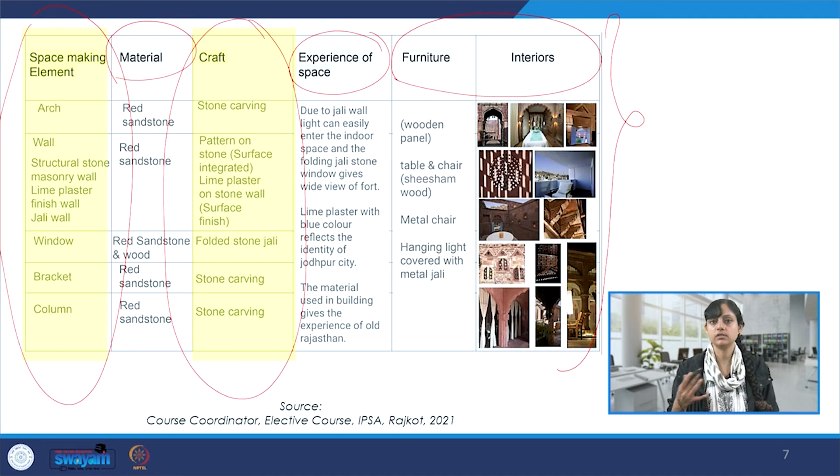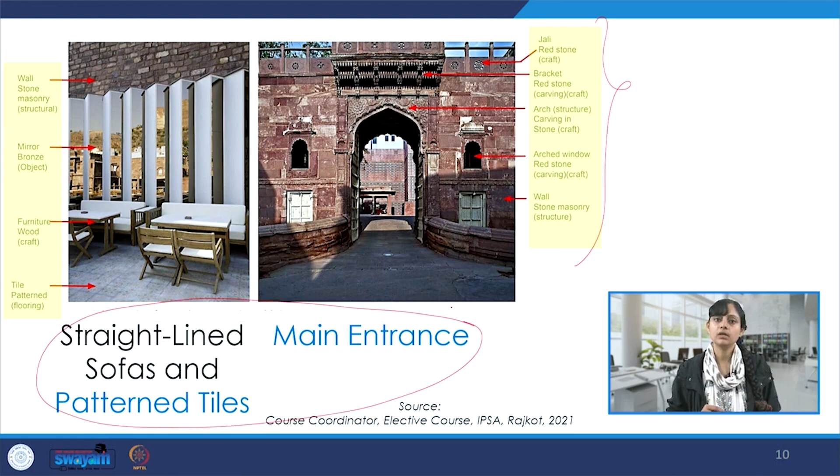So a lot of inventories like this, all focused on RAAS, and also on the communities and makers. Then these visual directories and observational analyses, where we had analytical documentation with important inferences, especially highlighting the fusion between craft and space making. More details we saw over here.

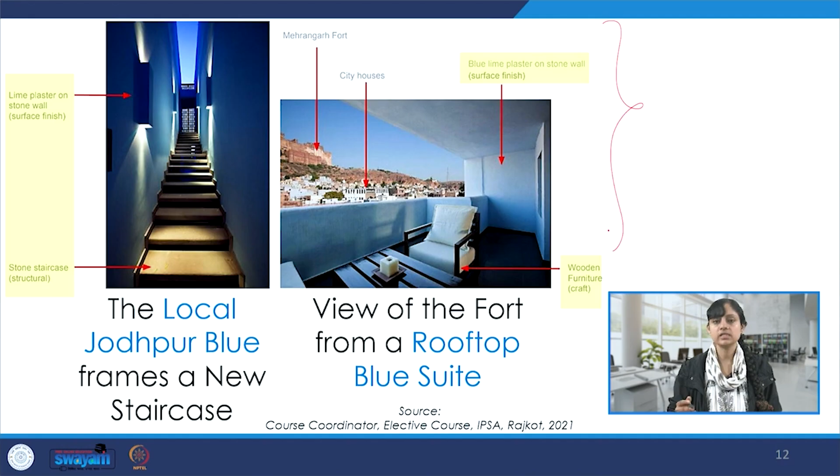So I'm browsing through these slides as a recap. It's a very awarded and celebrated project, and we could see why through all of these details that you saw during the week, and now here again as an overview.

We talked about lighting, color palette, material palette, detailing, the making of the jali, and different kinds of lighting during day and night, the details at the entrance from outside as well as the interiors, including the courtyard and the Mehrangarh fort at the backdrop.

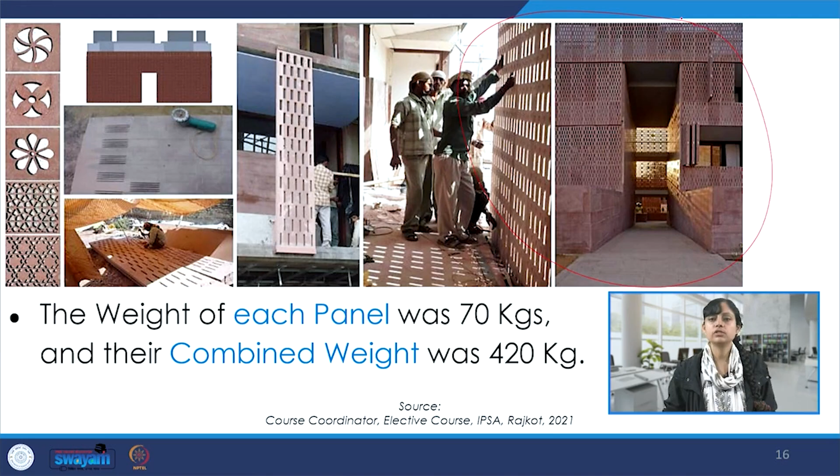Also interesting aspects regarding passive cooling, and this very contemporary detail in stone, which is inspired from the past, but here the weight is reduced and the detailing and expression is very contemporary.

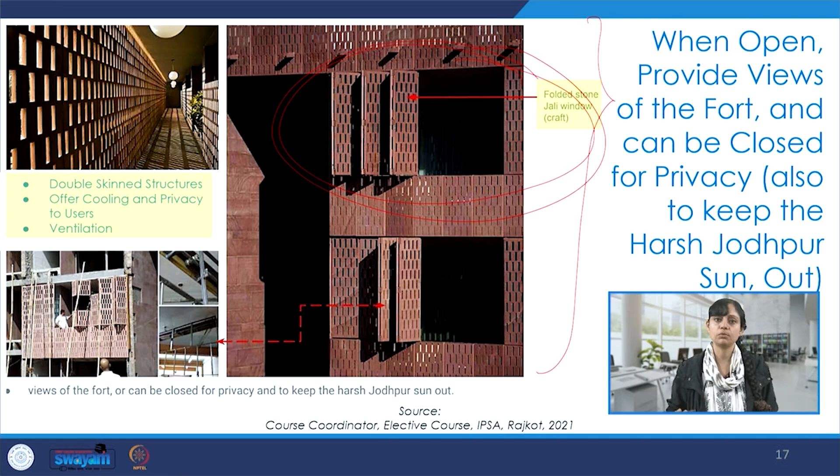So this particularly I had showcased during the lecture, how this is a very interesting expression of a traditional material and craft, but in a very contemporary manner, still being responsive to context and climate, and celebrating this ecosystem where the maker gets recognition and involvement during the making of this project. More details about this one.

Then we talked about some cases which were products or furniture design examples. We discussed product design in crafts, industrial design in crafts, and looked at some very interesting projects like this one.

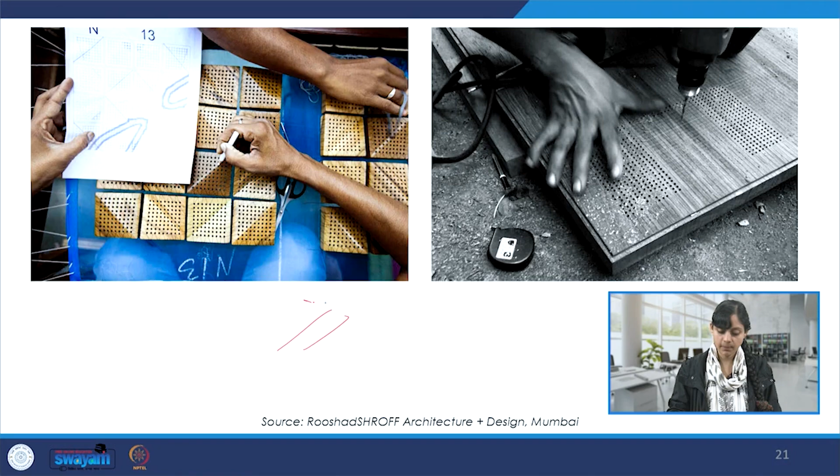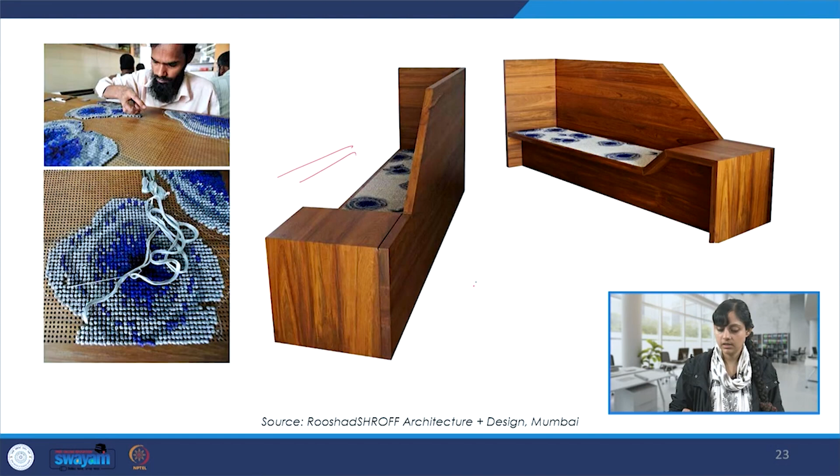Here, two communities of makers came together: hard material and soft material, so timber and yarn or fabric, and then the two makers coming together to create interesting and custom made furniture products like these.

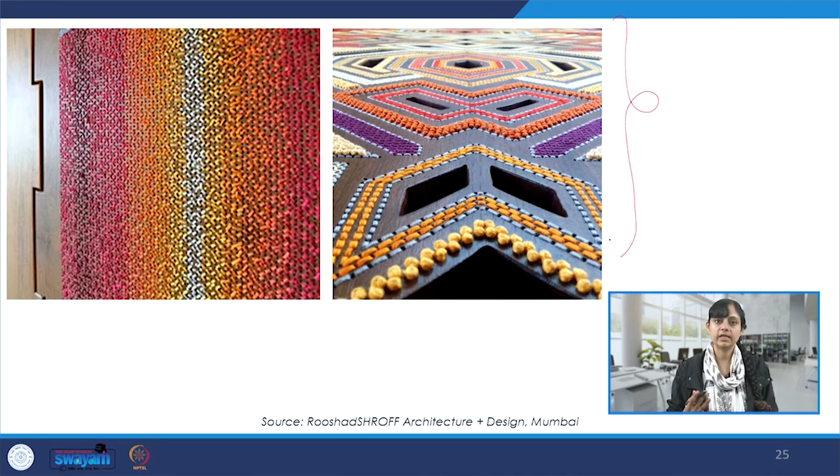We talked about this kind of collaboration also in the case of building elements such as doors and tables. Then we saw another project, here also combining hard material application with soft material application, and this one also focuses on circularity and sustainability, working with makers and craftspersons, at a furniture level.

And this is the Lakshman Sagar Resort, and we saw the works of the same designers who worked on this furniture range, along with the space making. The entire resort demonstrates this profound interrelationship between craft and interior architecture.

We also saw more examples from this project and from the same designers: light fixtures, involvement of frugality, designing indigenous, again circularity, hard material, soft material, so jute and metal, and so on.

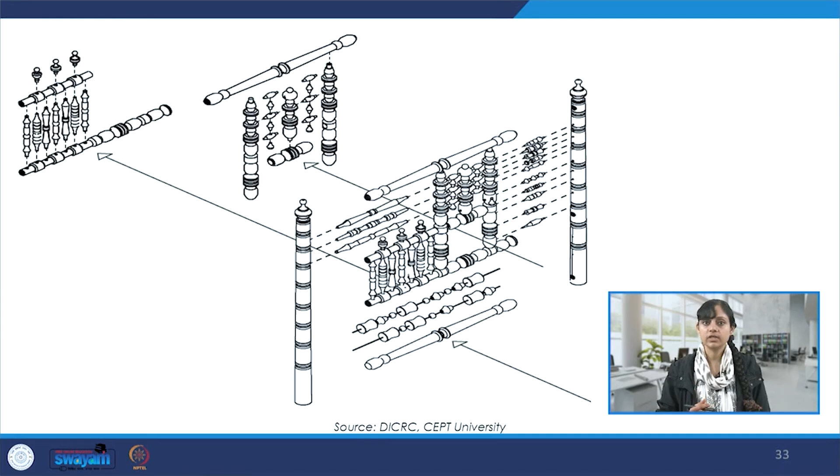This was another one which is the wood turning and lacquer crafts, and how it was done traditionally, and moving further, how it was explored in a very contemporary manner at CEPT University, and this collaboration still continues with the makers.

This was another one from Uttarakhand, and how some of the original motifs from the Aipan art of Uttarakhand have been adapted, and interesting products have been created, with the application diversified.

We also saw a very interesting case where interior architecture and crafts are utilized as ecosystems in a very aesthetic and functional manner, and the typology is the airport. We saw a lot of these details, discussed them at length, and watched a video showing the collage of different art and craft forms from India, the concept of bringing mini India to whosoever comes to this airport, promising them a glance or glimpse of India, including the rugs and fabrics. So at all eye levels and in varied capacities, there was a huge amount of detailing focusing on the space-making crafts.

We discussed this very historic, beautiful and insightful example, the Sommerfeld House, looking at interior architecture and crafts, furniture and crafts, products and crafts. We tried to understand the Bauhaus school, its ideology, and the importance of color and form, and how they highlight the principles of composition, color theory, and craftsmanship, and then tried to understand this house through all those lenses.

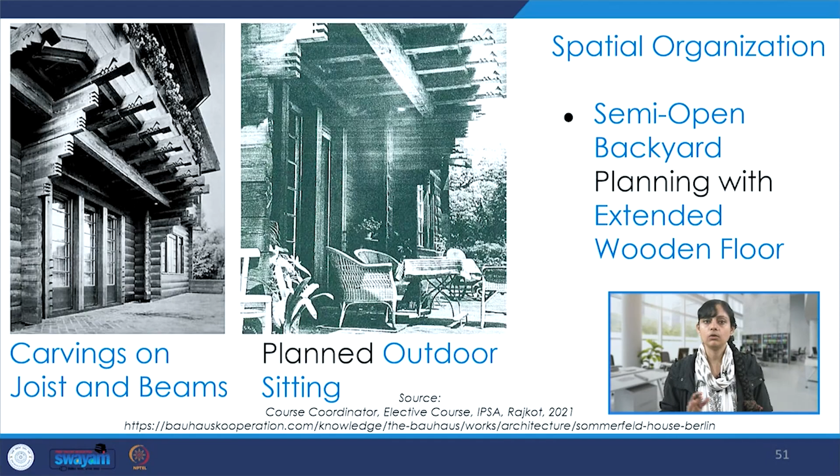Through this inventory and case study, we also looked at Marcel Breuer's works, which are still referred to by a lot of designers. We saw the details of how he and other designers who worked in and with Bauhaus approached their process, focusing on the ecosystem between material, making, and maker. We saw all these inventories, visual directories, and observational analyses through the selected case studies.

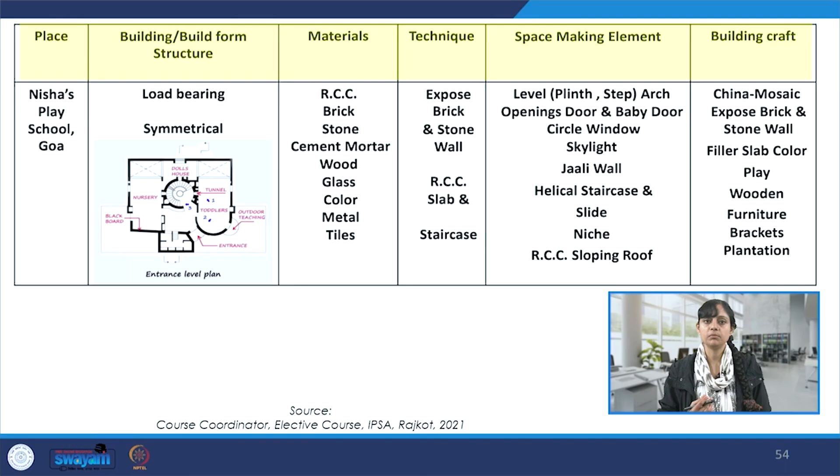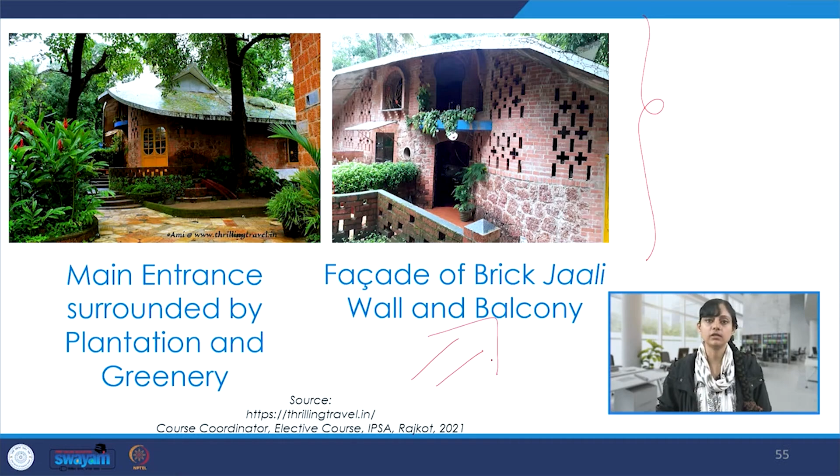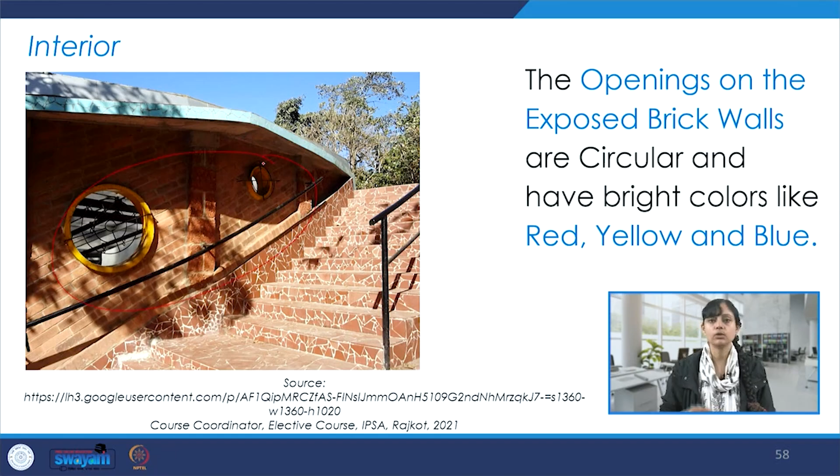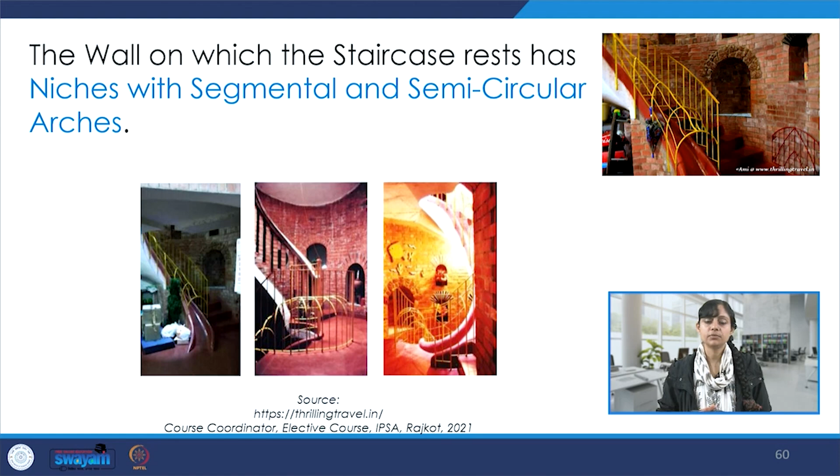This was another case study that we saw, a very famous Goa-based project. The students had created inventories and tried to decode this entire project through space-making elements and space-making crafts, highlighting especially the craft design explorations and the transdisciplinarity between craft and interior architecture—lots of details from that well-known project by Gerard da Cunha, the very famous architect, reflecting some of the Bauhausian ideology in terms of primary colors and the power of shape, form and color. The students brought all this understanding to the presentation, the exhibition, and the juries, showcasing all the work they had done.

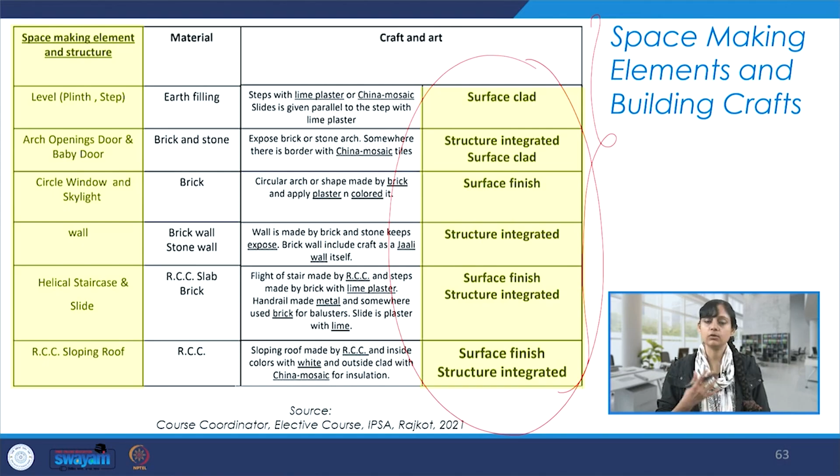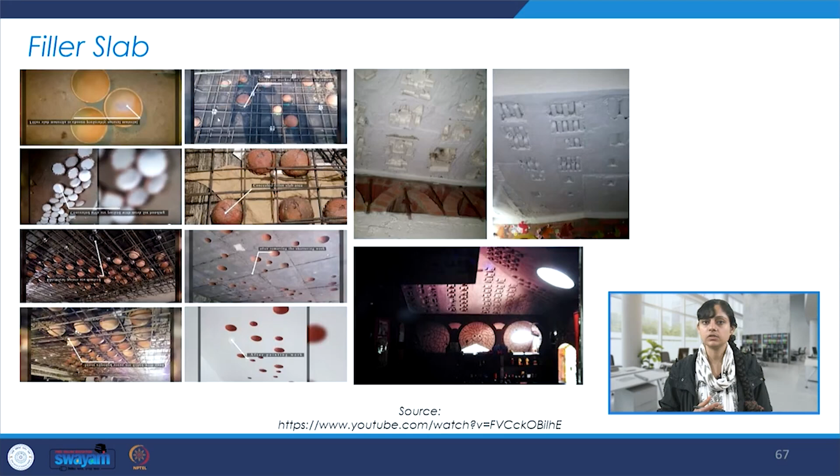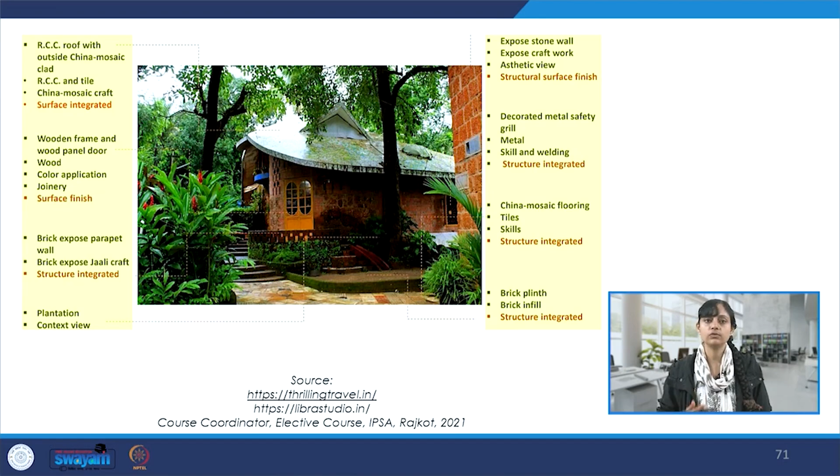Again, more inventories like this, also touching upon the classification system we had discussed—whether the craft is seen at a surface level or a structural level, and so on. They were able to apply this understanding, and although more work and some revisions are required, the effort was fantastic. The case studies they selected were also quite relevant to the explorations we are doing. More inventories covered material, maker, surface or structure—interiors, exteriors, furniture, walls, everything decoded in great detail, including flooring, China mosaic details, and different kinds of plasters.

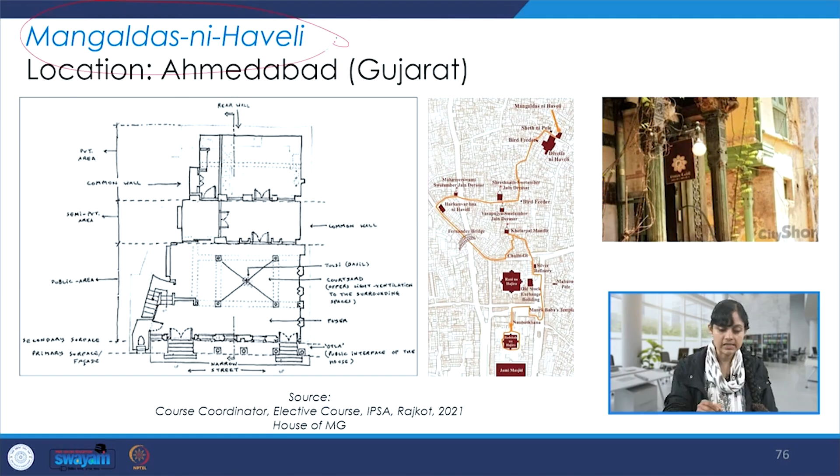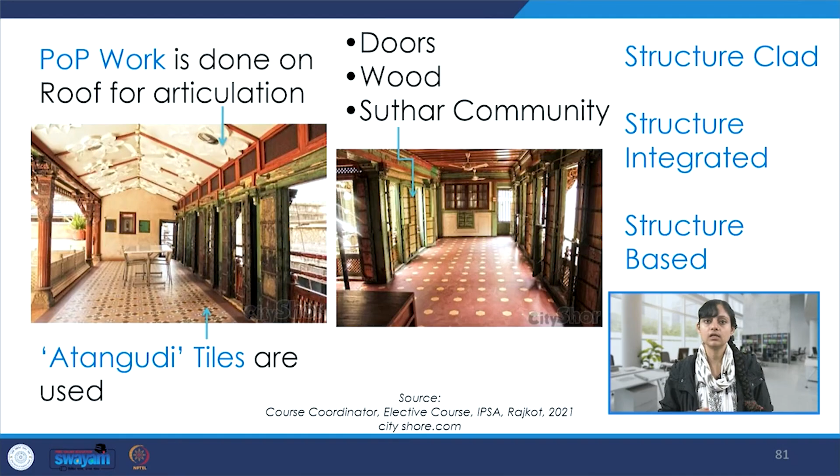Another very interesting example we saw was from Gujarat, and I appreciated this portfolio because they started by mapping the craft and the communities—who the communities are, what craft they do, and where those craft practices are reflected in the built form. They created a mental map first, then decoded the entire case study through inventories, understanding the communities, their practices, skills, and techniques as reflected in the built form, along with more visual analysis.

More inventories. This was another project I designed with my team—actually a proposed project, not executed, but we completed the design, and we discussed this case. It's an existing office that we completely revamped and facelifted, giving it the identity of the Himalayan state of Uttarakhand, which was not reflected in the existing office. It's one of the important government offices for the state government, located in Dehradun.

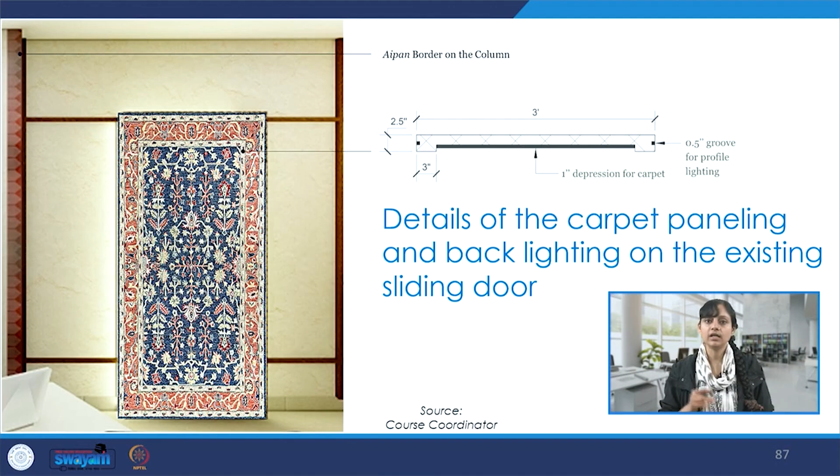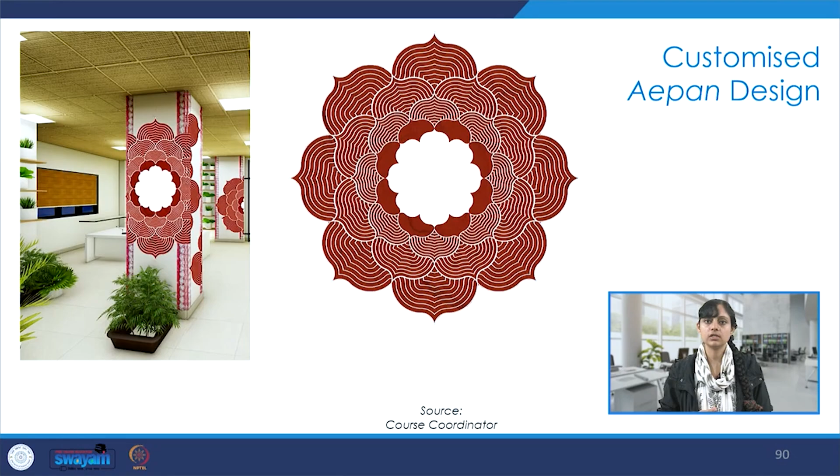And we gave all these options where we highlighted the potential of indigenous designs, art and craft forms from Uttarakhand, which could be tapped to create space making applications. These were the options shown and discussed during one of the lectures in week 8, different options given to the clientele, and they selected 2 out of these. We discussed all of these options in detail.

Then we talked about the CCIs, the creative and cultural industries, and why we are discussing them, especially in the subject of interior design, and the plethora of possibilities it opens for us as designers, what we could bring to the table when designing, and what kind of worldview we could capture and demonstrate through our designs. So we began by understanding what CCIs are and why UNESCO emphasizes them so much.

We tried to understand the varied subsectors of CCIs, focusing on visual arts and architecture primarily throughout this course. When we talk about design, art and craft, it's under this larger umbrella of visual arts, and architecture is another subsector. These two are what we are primarily talking about throughout the course.

We also saw some very interesting statistics that help us understand that art and craft have economic value attached to them, and are possible contributors to the GDP of nations. So we saw these kinds of details.

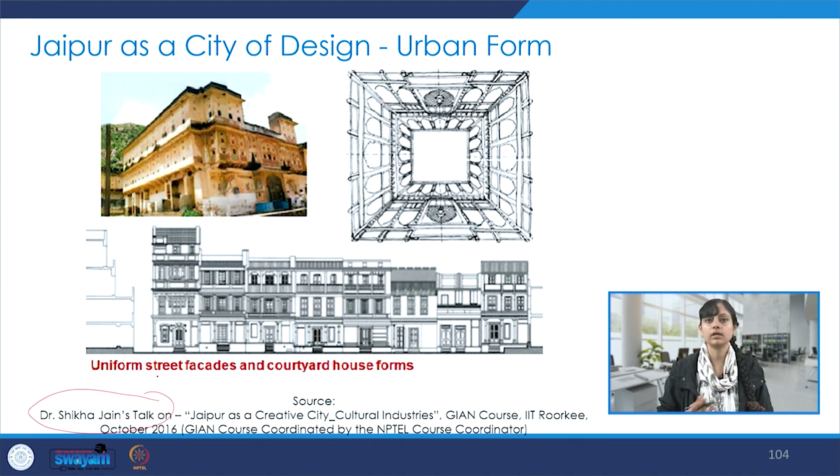So we saw this entire case of Jaipur, and there's a lot of work done by Dr. Shikha Jain, whose work I follow very dedicatedly. She also showed this work as part of one of the lectures where I had invited her as part of our GIAN course.

So this entire thing on Jaipur, we also tried to understand the building crafts, and where we see the application and integration of these crafts for space making. Those kinds of examples we saw for the case of Jaipur, and then some paintings.

We also tried to understand the Finnish creative and cultural industries, trying to gather a worldview and see what is the global discourse focusing on CCIs. Here there is a lot of focus on materiality, techniques, skills, makers, creative economy, and interesting indigenous designs which emerge from a certain context and have an international and global value.

So we talked about Japanese CCIs, and here also we see a lot of examples and mention of architecture, space making, calligraphy. And these are European CCIs, where we see the contribution to wider economy, whether it's tourism, food, design, or cultural experiences. So all of that.

There were these important sets of data which helped us understand how CCIs contribute in generating employment, how they were very crucial, especially during times like the pandemic, for well-being and psychological comfort, and then also how they quickly helped create avenues for employment generation later.

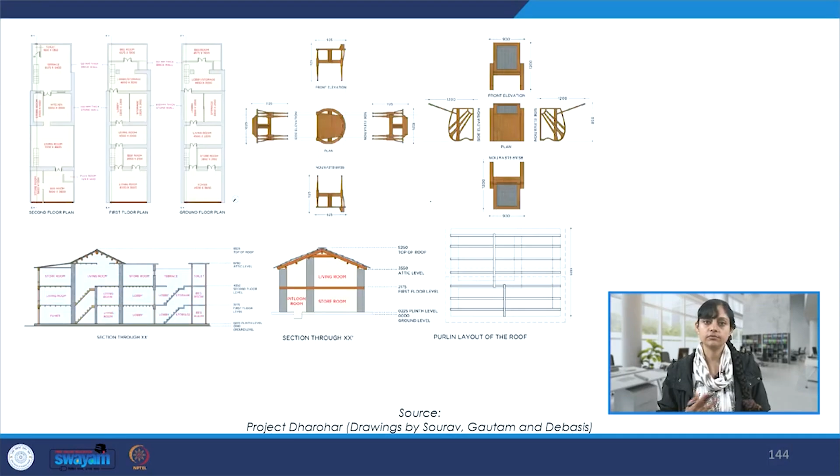There are a lot of details if somebody is particularly interested to know more, because these are also part of my PhD, which I defended at IIT Roorkee itself. So portfolios like this, which I fondly call the Kumaon portfolio, covered dissemination, resource building, publications, sharing findings, outreach, all focusing on CCIs, especially visual arts and architecture, the two subsectors we have been predominantly focusing on.

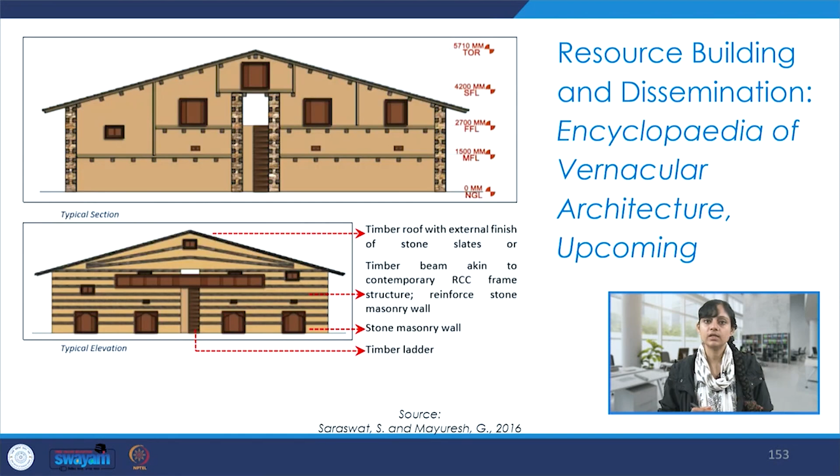More on dissemination: encyclopedia entries, exhibition entries, and these were also put at the ABCD Biennale, the first Biennale that happened in India, in New Delhi, also at the Ahmedabad International Book Festival, and several other events and exhibitions.

Monographs, all of these focus on the CCIs, some courses that focus on the CCIs, on the transdisciplinarity aspect we have been talking about. This book that I have written also focuses on all these similar aspects.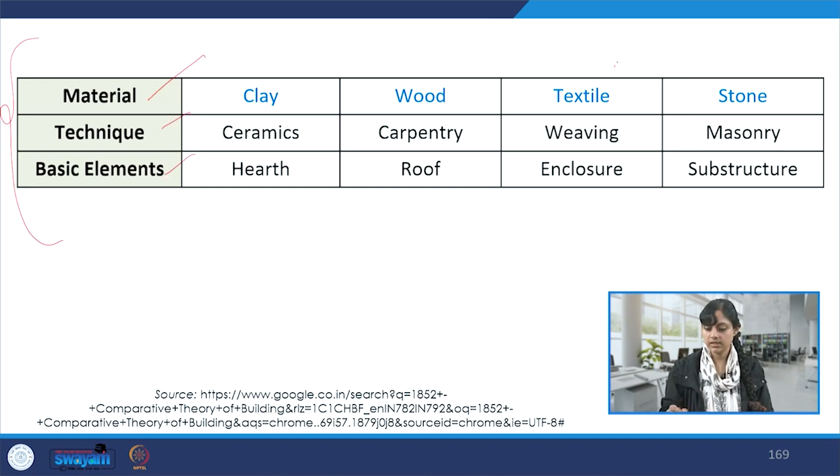We also talked about interior design, focusing on opportunities, challenges, experiments, and some future roadmap, and we predominantly talked about fusion of textiles and architecture, starting with understanding the historical examples, the works of Gottfried Semper, and this very interesting inventory with an order of classification emphasizing material technique.

Basic elements, and especially highlighting textile, weaving, and enclosure. We saw different kinds of illustrations that showcase the potential of textiles in creating structural implications or creating potential applications for space making.

And these kinds of drawings, where we are again looking at strength and stability, some historic examples such as Maori architecture, and more illustrations where we see the strength that weaving techniques impart and how they could be experimented with and new designs explored.

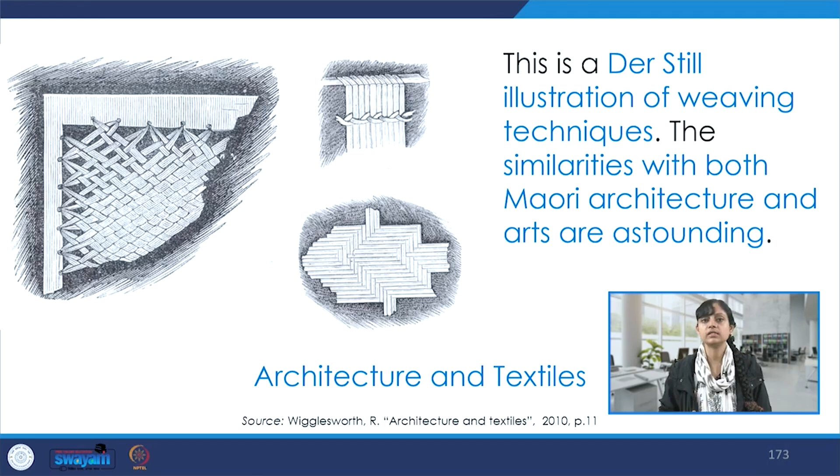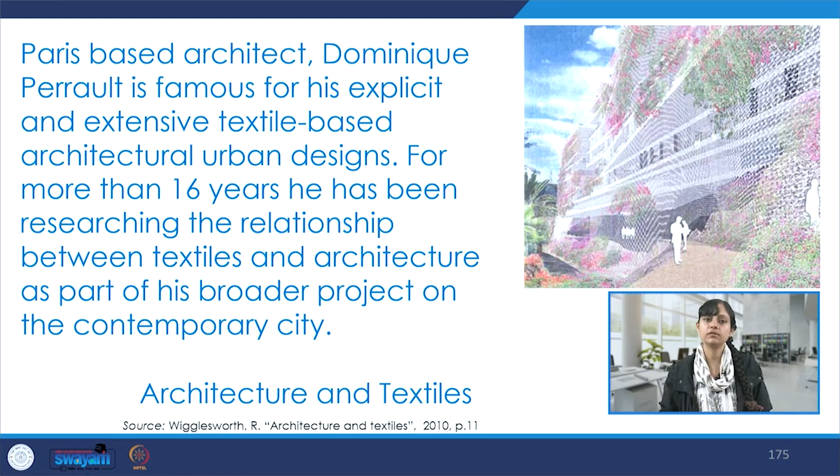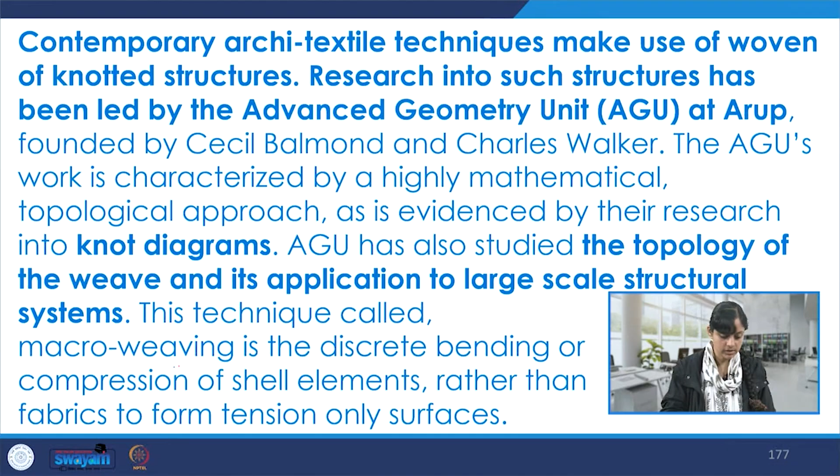We saw some very contemporary examples of fusion of architecture and textiles, and how these experiments are still continuing and still to be explored further, with the possibility in future to keep working on this fusion. We tried to understand how it is done and what macro weaving is, through the experiment Arup has done with Cecil Balmond.

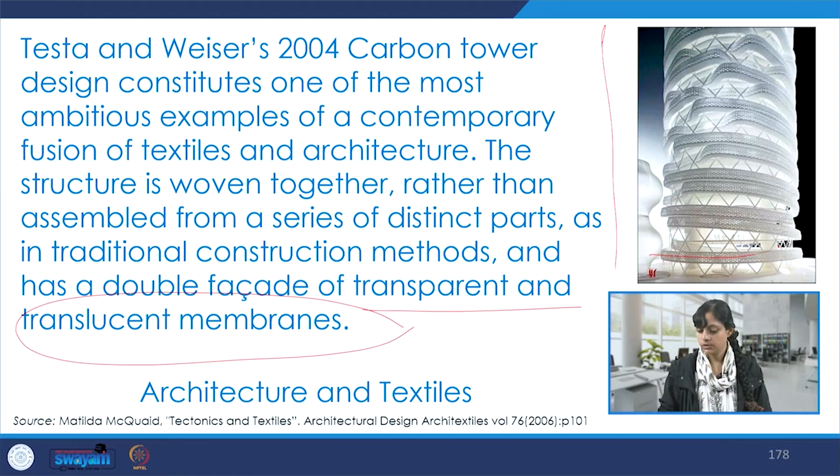This interesting tower, where transparent and translucent woven membranes are used to create this kind of space and enclosure.

And then we tried to see the overview of different kinds of fabrics, their properties, and what kind of applications they allow for, especially in interior design projects. So these kinds of inventories we explored, and we saw the different kinds of fabrics that could be utilized.

I also showed this very interesting published work, done by one of my students now. She is placed well, and she did her PG thesis with me at IIT Roorkee in the Department of Architecture and Planning. We saw applications of weaving techniques in space making and different elements explored.

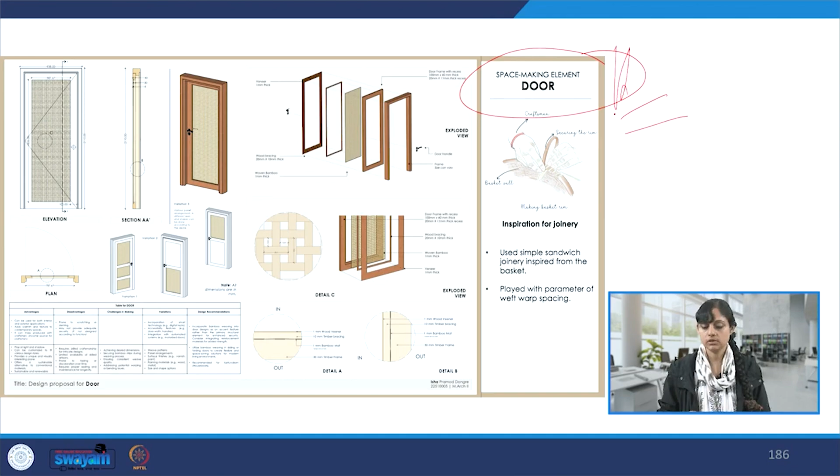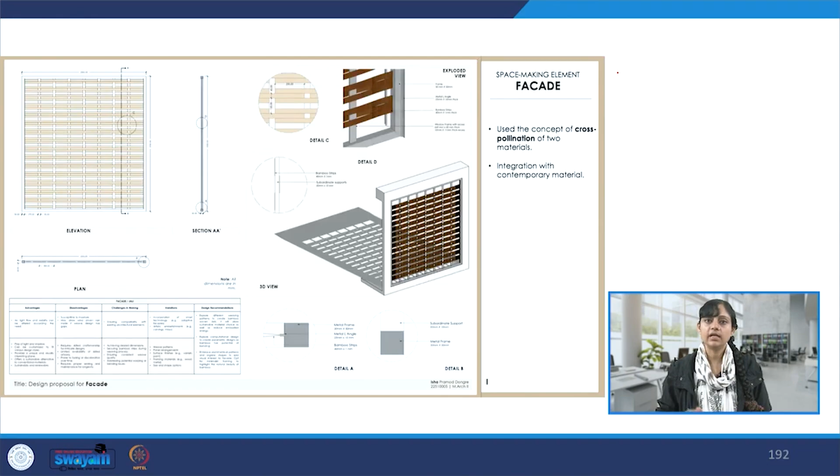Space making elements like door, window, railing, partition wall, and more, even the entire facade itself. These were all focused on the weaving techniques and crafts of Kerala.

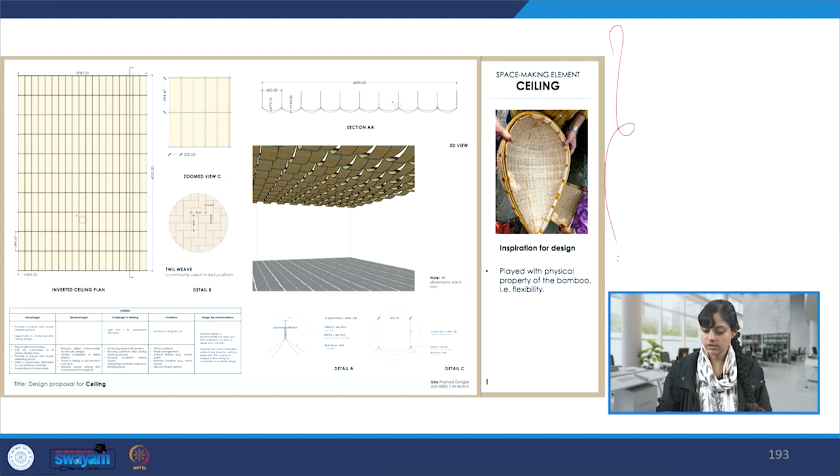And then the prototyping and experimentation was done based on the traditional knowledge, with participatory discussions with the community of craftspersons.

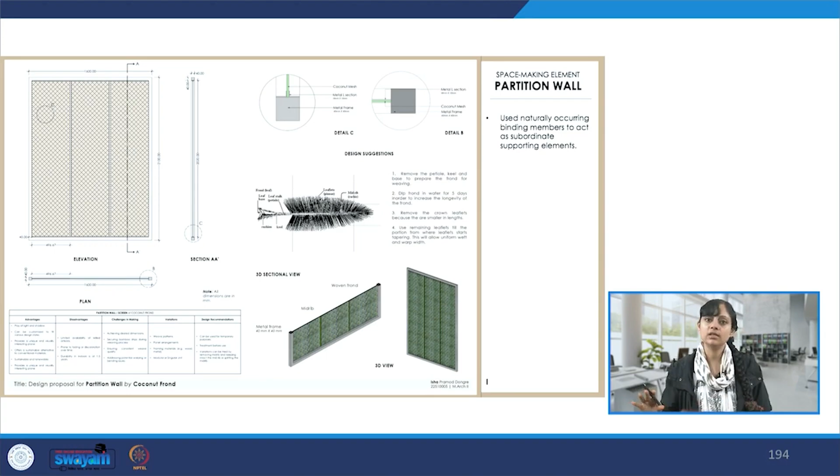We saw these kinds of experimentations, and also discussed the different possibilities in interior design projects when we focus on customization, transdisciplinary explorations, and especially working in an ecosystem where there is no hierarchy of work, but each one learns from the other. Designers, makers, and craftspersons work together, with a profound understanding of the entire value chain, and each stakeholder's role and contribution is recognized and celebrated.

There is an exhaustive list of references throughout the course. Some of them I have put here as part of today's summary lecture, including books and websites. A lot of references are already at the end of every lecture, and a consolidated list is also provided at the NPTEL website, all focusing on this summary of the entire week.